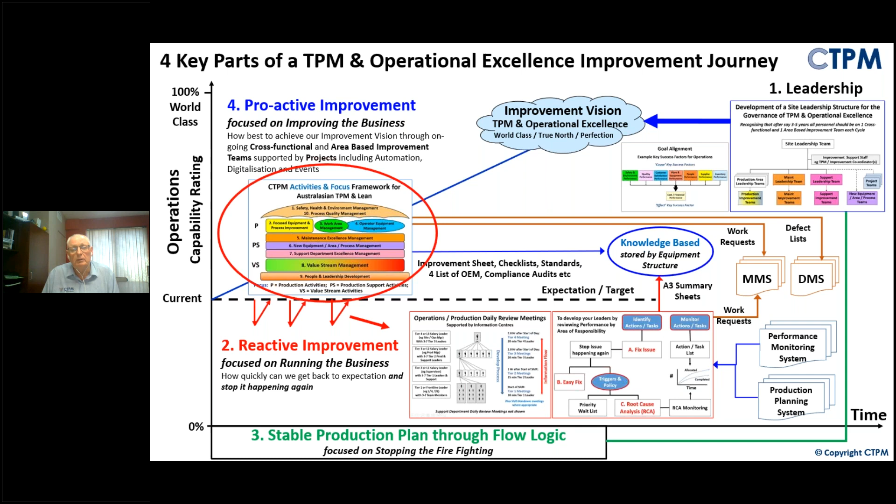I thought just to put this into context of our 4 key parts of an operational excellence improvement journey, which is leadership, reactive improvement, stable production plan, and proactive improvement. What we're talking about today is some of the activities and focus of our proactive improvement, which is our hamburger model, and it's got the area that's probably the biggest focus when you first initially start looking at OEE and productivity in a production environment.

You would look at focus equipment and process improvement, which is a cross-functional team, and then later on you'd move on to the work area management and operator equipment management activities, which are area-based, production area-based teams. But overall, it's not only the production area, but it's the support areas that also have a big impact on OEE and productivity. So it does cover a fair bit in this area.

So let's get started with the equipment effectiveness and people performance, and start off with equipment and overall equipment effectiveness. You've probably all seen the OEE model, which is about availability, rate, and quality, based on the premise that equipment is not effective unless it's there when you want it, running at the ideal rate, and producing perfect product first time. Now, in our model, we have the 7 big losses, unlike some of the early models of OEE when TPM was first developed, where they didn't include planned downtime.

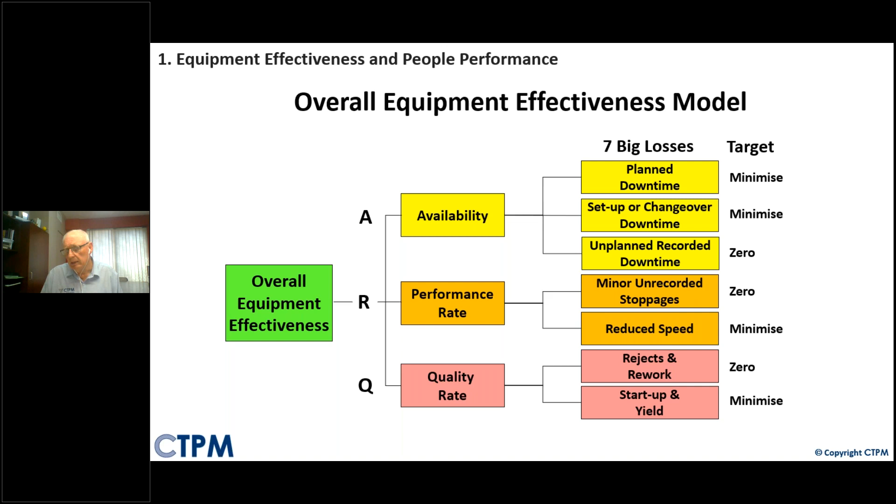What we've learned, and also the people who developed TPM, the Japan Institute of Plant Maintenance, or who recorded it - Nippon Denso or Toyota actually developed TPM - but they've now added the planned downtime in their model as well, because what we find is a lot of plants run more than one shift, and also there's a great opportunity there to impact on the output of the plant by managing planned downtime.

So why is OEE improvement important for TPM and operational excellence? Well, we want to increase capacity, and every increase in percentage OEE should result in equal percentage increase in good output, or be able to make the same amount of good output in less time. And that's why it's important to have the 7 big losses.

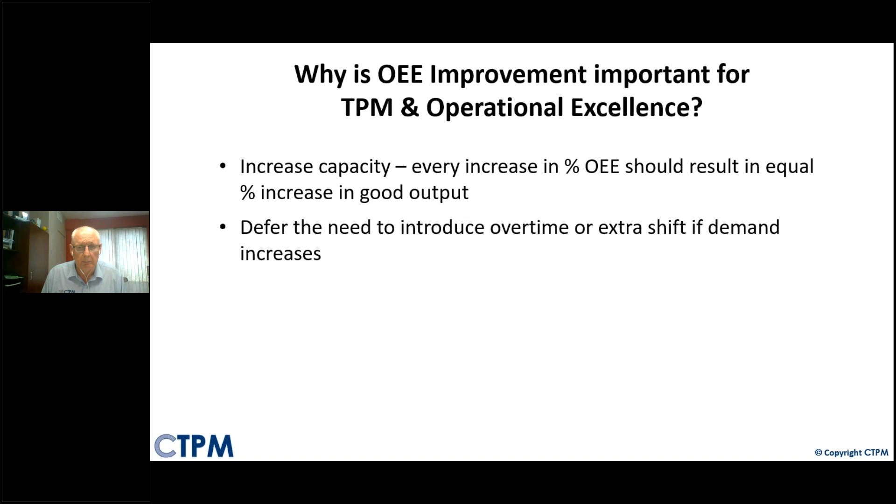We want to defer the need to introduce overtime or extra shift if demand increases. One of our clients, Cooper's Brewery, over in South Australia, since their journey, when we started, I think back in about 2003, in the early days, only running one shift, but they kept getting bigger and bigger demand. But by improving OEE, we were able to defer the need for the extra shift for quite a number of years. We also want to free up time for production area-based team improvement activities.

And I spoke about work area management, which is our version or an enhanced version of 5S, and operator equipment management, or some people refer to it as autonomous maintenance, where production line may need to stop, especially while doing clean for inspections. So if you've got to stop your production line, you need to compensate that by increasing your OEE first.

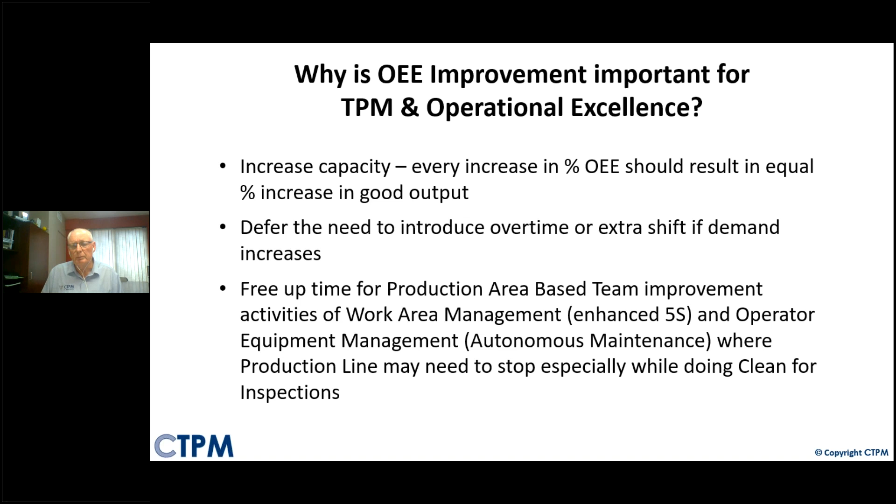And that's why we start with focused equipment and process improvement cross-functional teams, which do not require the line to stop, before you move into your area-based team activity, which if you don't do, you'll miss out on probably half the gain of improving OEE.

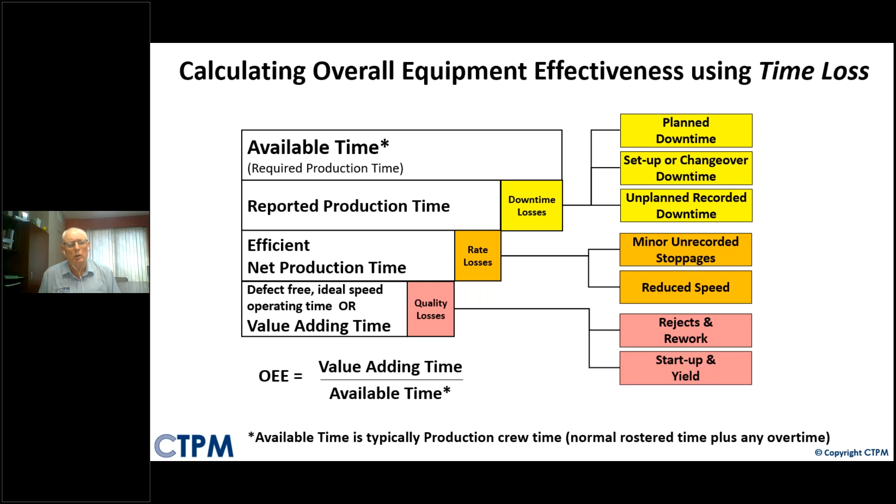So how do we calculate OEE? You can use what we call the time loss approach, where you start off with your available time and take away your downtime, rate losses, and quality losses, and your OEE is value adding time over available time.

What a lot of companies do is create what we call an equipment loss model, which is a little bit more detailed than what I just showed you, where you start with your theoretical time, which is, if you're measuring for a week, that would be 7 days, 24 hours by 7 days, 168 hours, for example.

Now, there will be no demand, and that would be, for example, you may not want to run your plant on the weekend, so you're running 5 days. No demand is a loss that is really dictated by your marketing and product development people, because they're the ones who will put demand on the plant. Got nothing to do with operations.

Then you have special events, and we tend to identify those because that, again, takes up some time, and we normally take that out of the OEE equation. So special events might be new product trials, or you may have a major shut. You might have regular monthly 8-hour shuts on your line for maintenance, but every 6 or 12 months, you might have an extended 24-hour shut or something like that, which is a one-off event.

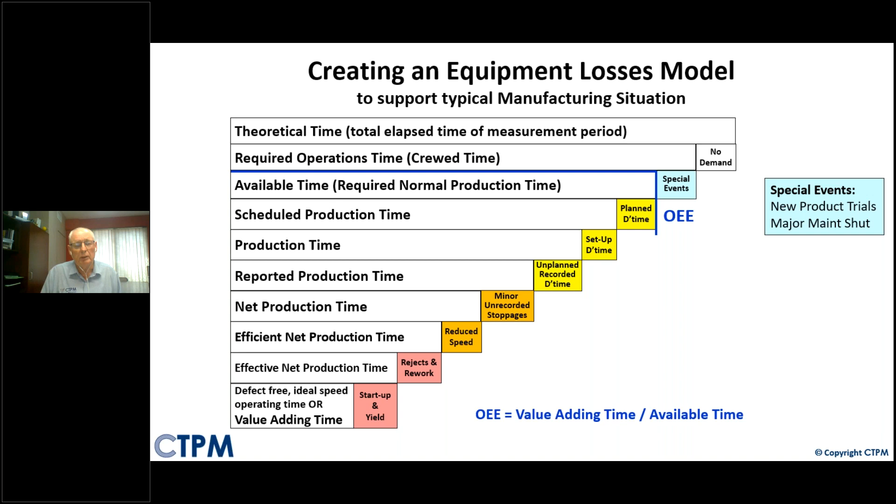So again, we pull that out of the equation, which means your OEE is available time with all the losses, and OEE is value adding time over the available time.

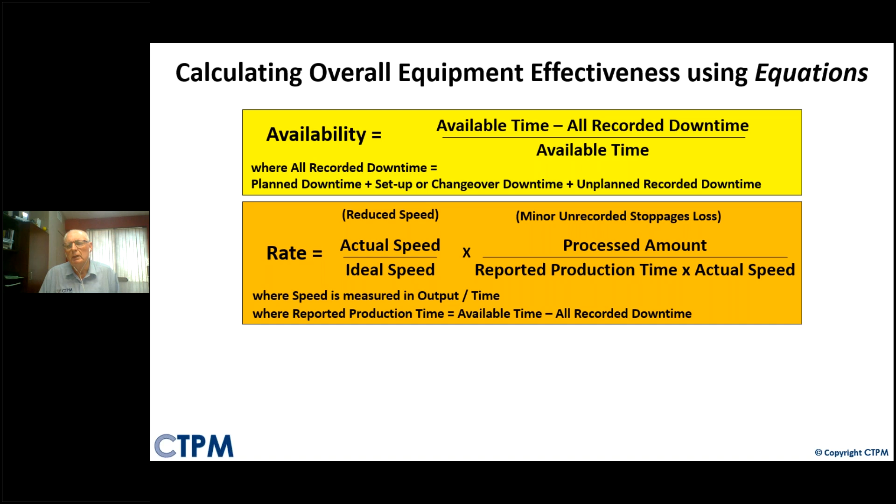The other way of working out OEE is using equations. So you have an equation for availability, you have an equation for rate, which takes into account reduced speed and minor unrecorded stoppages. And you then have your quality equation, which we often use a mass balance approach for, good output produced over processed amount.

By having those three measures as percentages, you can create your OEE by multiplying availability by rate by quality. And what we've done in our training is we get people to calculate OEE using the time loss model and the equations, and you should come up with the same result if you're doing it correctly.

Now, there's a simple way of calculating overall equipment effectiveness using what we call the high-level equation. The high-level OEE can be calculated by multiplying the availability, rate, and quality equations and reducing the common parts. So if it's on the denominator and the numerator on more than one equation, you can pull it out, and that results in a simple formula.

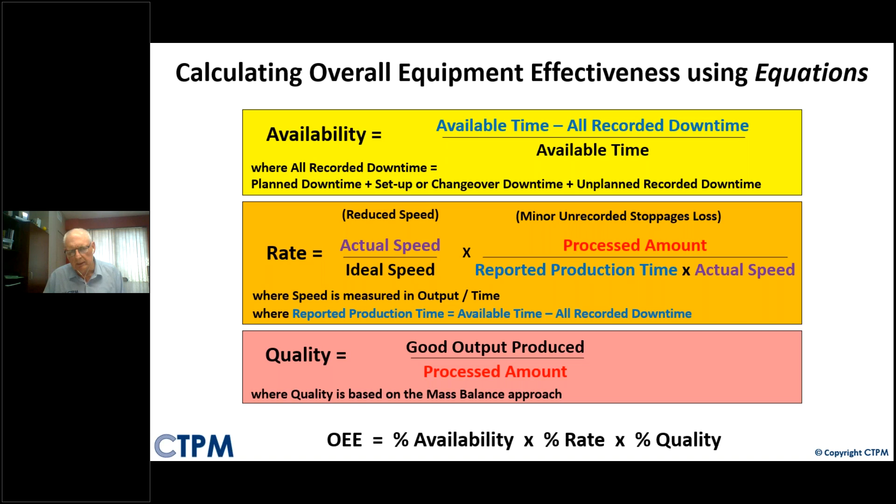Just to explain that in a bit more detail, with availability for example, you'll see those in color: the blue and the blue crosses out, the purple and the purple crosses out, the red and the red crosses out, and you end up with your good output produced over available time times ideal speed. That's what we call the high level equation. And obviously when you create an equation, you have definitions for what we mean by available time and what we mean by ideal speed.

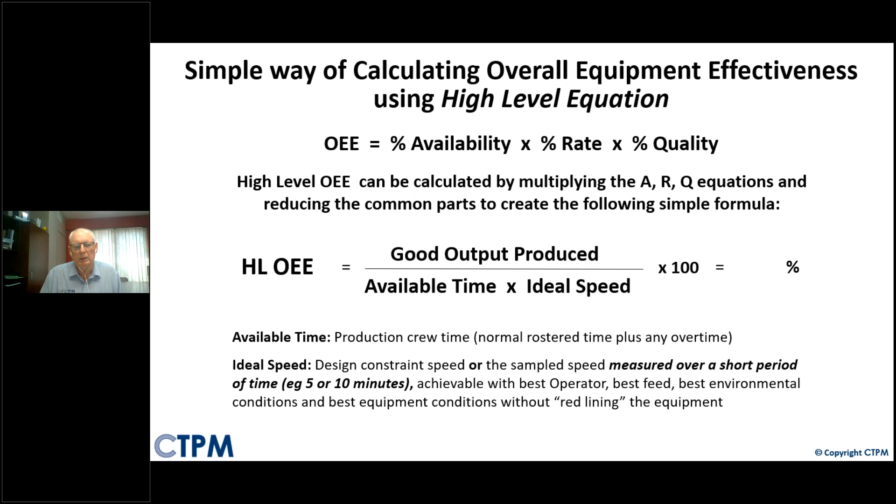Now, what's the advantage of a high level OEE? When we go into sites, we often find that they are graphing their OEE performance based on their recording system, whether it be automated or manual. And what we do is go and look at using the high level equation, because we know that is the most accurate way of measuring OEE. It doesn't tell you where the losses are, but it's the most accurate method.

So what about people performance? We've talked about equipment performance. Let's talk about people performance. That's normally productivity. Now, productivity can be measured in two broad ways.

One is what we call company productivity, which is the total sales dollar value over the total number in the workforce. Coopers Brewery used this as one of their measures. When we first started in 2003, that figure was roughly $500,000 sales per employee. In the last year or so, when the operations manager gave a presentation, he was talking about now they're generating productivity of about $1 million sales for every employee. That covers the whole company, but it is a productivity measure, and obviously has a lot to do with your product development and marketing to improve the productivity of the total workforce.

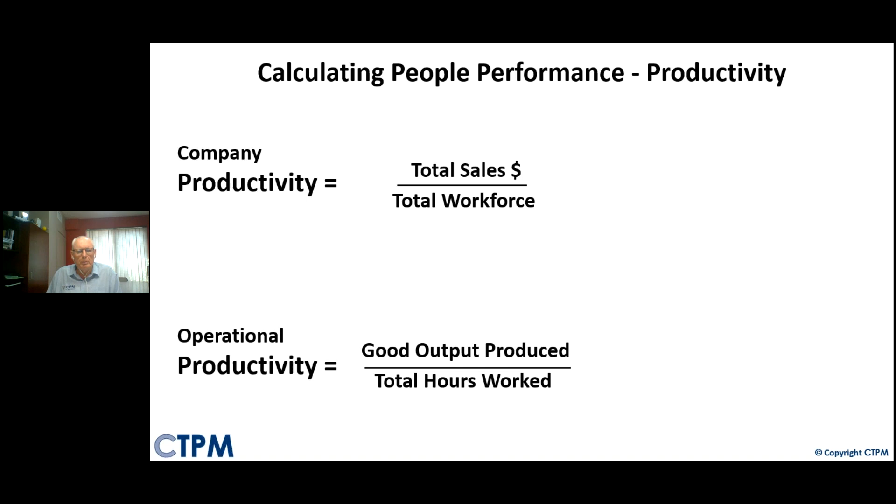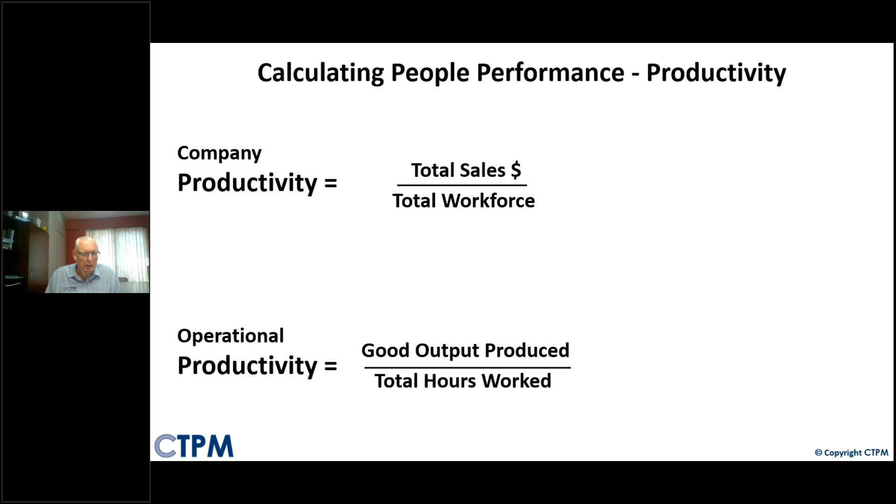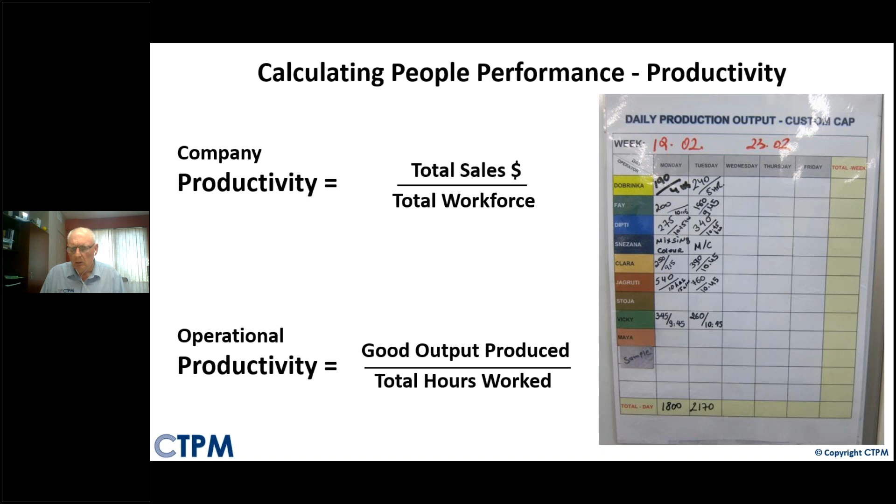From an operational perspective, productivity is more often measured on the basis of good output produced over the total hours worked, or the total hours you put into the production line or production area. An example, one site we're working with, they used to record this. This was an interesting operation, because they were putting printing logos onto safety helmets. They had a number of different printing machines, all with different parameters, running different ways, with different mixtures of numbers of colors in a logo, and how many logos went on the helmet. So they were capturing what they were doing, but that information was pretty much useless unless you started relating it to a particular product. That's sometimes one of the issues with productivity.

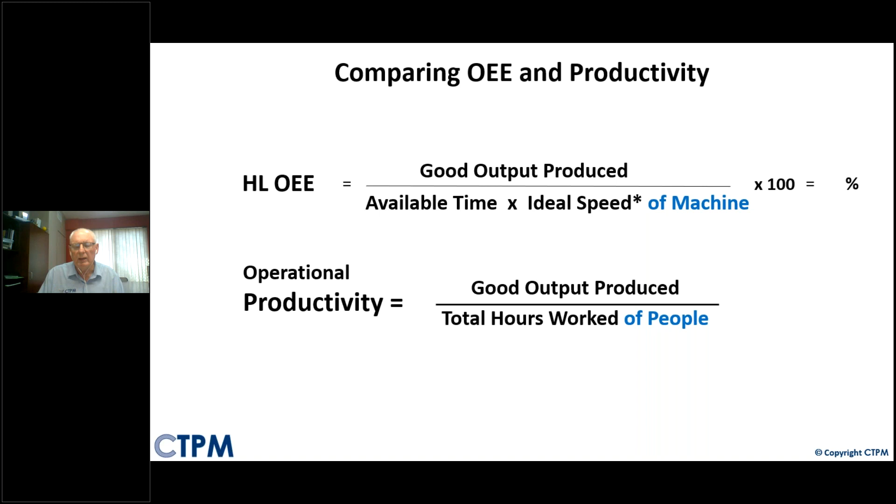So comparing OEE and productivity, our measure for OEE is good output produced over available time times ideal speed, and that's all about the machine, the available time and ideal speed of the machine. Operational productivity is the same good output produced, so you've got this common factor. However, underneath, it's got nothing to do with the machine. It's how many people went into producing that output. This is where they are quite separate measures, and hence you need to measure both.

OEE will not reflect on the people input. It is not designed to reflect on people input unless, of course, you're adjusting the ideal speed, because your ideal speed is the best possible speed you can get out of the machine. Now, if you've got a machine that is influenced by the number of people - for example, if you have a line where extra people at the end packing quicker means the line can produce more - then if you're manning it with, say, 4 people in the packing area instead of 3, your ideal speed changes. And that will reflect a bit in your OEE. But that's becoming quite a complex little exercise. And a lot of companies...

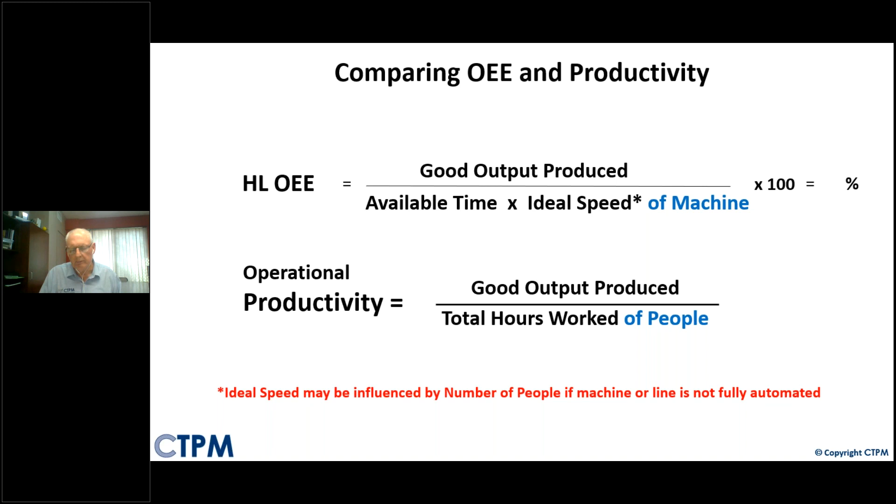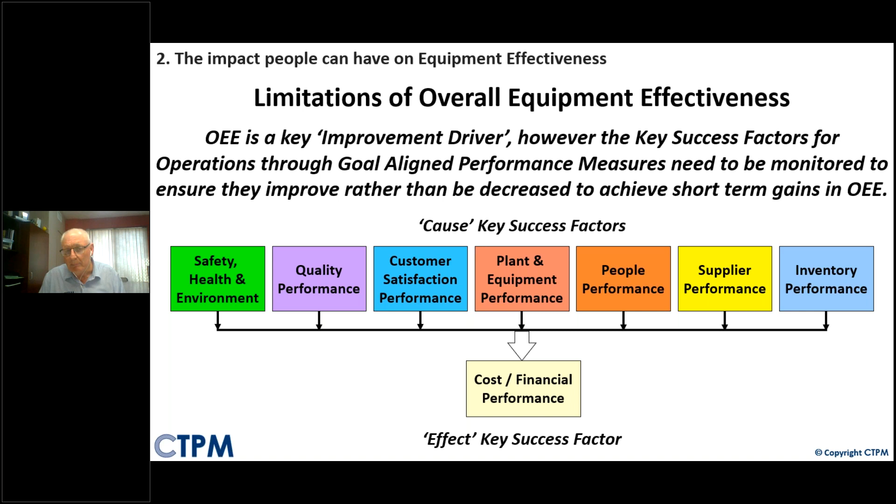So that's the measurement model we look at. And if we just think about the implications of some of those factors, for example, safety, health, and environment, you want to measure that to ensure people aren't doing unsafe tasks to improve performance. In other words, taking risks to get more good output.

And that would affect both your productivity and your OEE. Quality, to ensure we do not lose sight that quality is the most expensive of all the losses and waste, especially when you're measuring OEE.

For example, a slide from our online course or two-day workshop. We put this slide up and say you can have two situations. When measuring OEE, it's availability times rate times quality. So you could have an availability of 90, a rate of 95, and a quality of 99, and multiplied out you get 85%. Or you could have another situation where availability is 99%, rate is 95, but quality is only 90 - in other words, 10% of what you make you're throwing in the bin. You've still got 85% OEE, but which situation is best for the company? Well, in most cases, situation one is much better, because you're not throwing away 9% of your raw materials or your products that you've added value to.

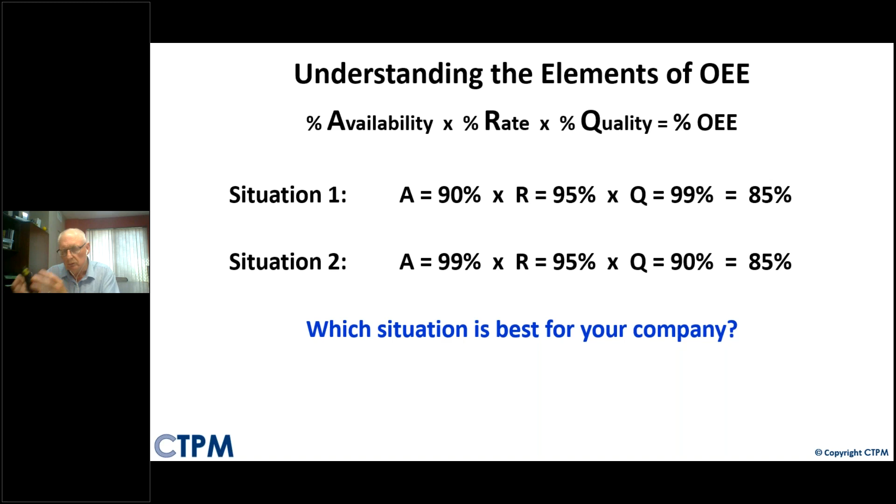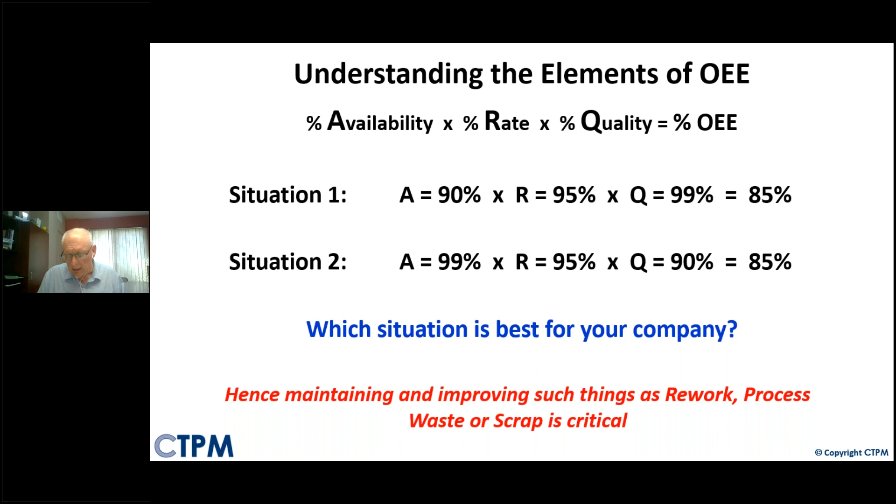Whereas in situation one, yes, you're not running the line 10% of the time, but you're not wasting any product. In situation two, you're wasting a lot of materials. So that's why maintaining and improving things like rework, process waste, and scrap is critical to focus on. You've really got to understand the elements of OEE, and of productivity, when you're trying to measure good output.

Other things: customer satisfaction, to ensure there are no downstream customer complaints resulting from a strong focus on getting product out to achieve a good OEE result. I've seen situations where people make products, move them into storage, or - in one case - a site made a cement board that went into an autoclave and cooked for 24 hours. Then it came out and went onto the finishing line. But to improve their OEE, they sped up the line, which put ripples into the board. So when it went to the finishing line and had to be sanded smooth, there was a lot more work involved. So OEE looked good, but the downstream finishing area wasn't impressed. That doesn't show up on your OEE measure - it shows up as an internal customer complaint.

Plant equipment: to ensure good output correlates to OEE, so all losses are being captured - we've talked about that. People: to ensure more people aren't allocated to an area to compensate for problems affecting performance.

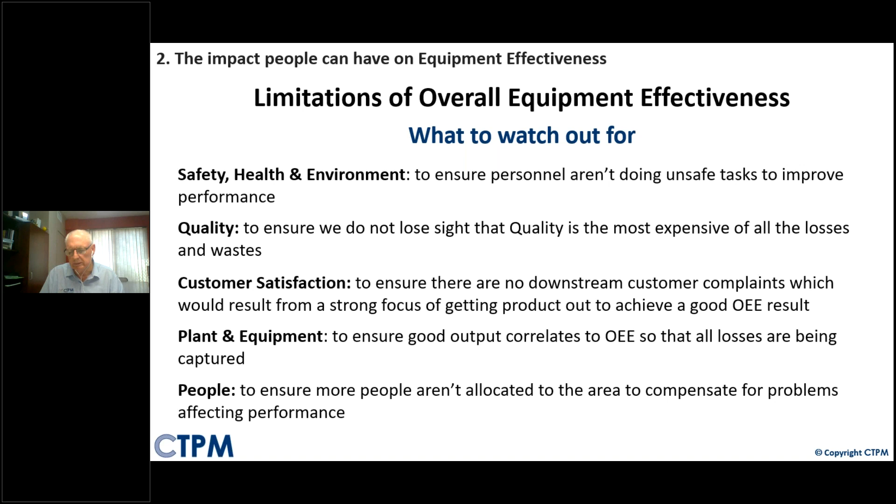I've been on a site making little blocks of butter. On the machine, the block would come in, they'd carve it up, wrap it in a foil special label, fold in the ends, and it would go off to be packaged. What happened on this line was the machine folding the ends had a fault on one side. So rather than stop production, they put an extra person on the line whose job was to simulate what the machine did - fold the end of the block as it went past. By the end of the day, the OEE was good, the line didn't stop, the line made the output. However, if you're measuring productivity, it was down because you had an extra person on the line. This is where you've got to measure both - you can't just look at one of them.

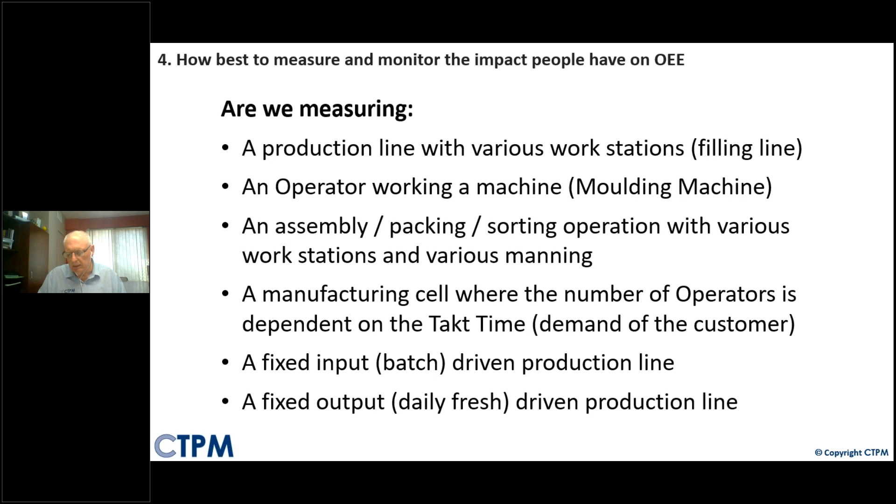Then you've got fixed output, like daily fresh, making bread—people want a certain amount of loaves per day, or printing newspapers, you only want a certain number. Again, different scenarios. So all these scenarios need to be well thought out in putting together the best way to measure what we're doing.

Moving on to the last point, the importance of a team-based approach. We are very strong on what we call ongoing improvement, where it is team-based, so people are growing and developing in a team environment. It's about getting everyone to spend, for example, 5% of their normal work time in an improvement team all the time, as part of their job.

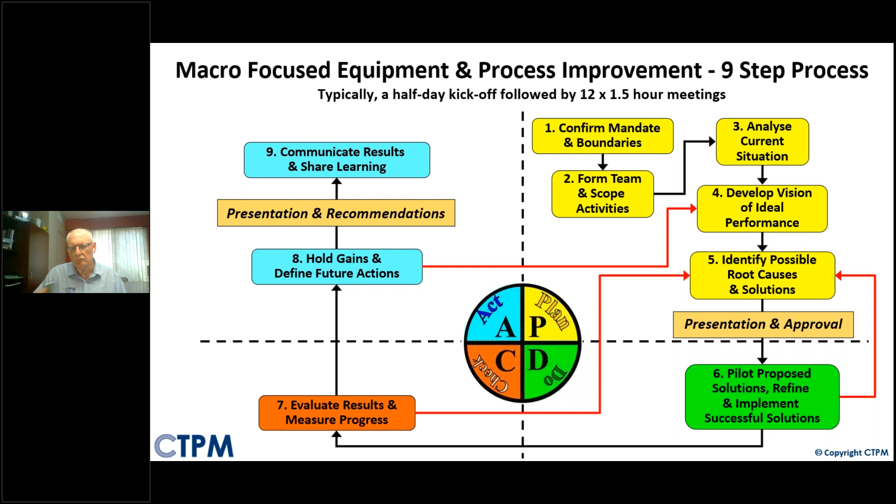You're using a 9-step structured process, which is well proven, using plan, do, check, act, recognizing as you progress there's some iterations. If things don't actually get the outcomes you want, you come back and recycle. So it's not just a straight linear process, it's an iterative process.

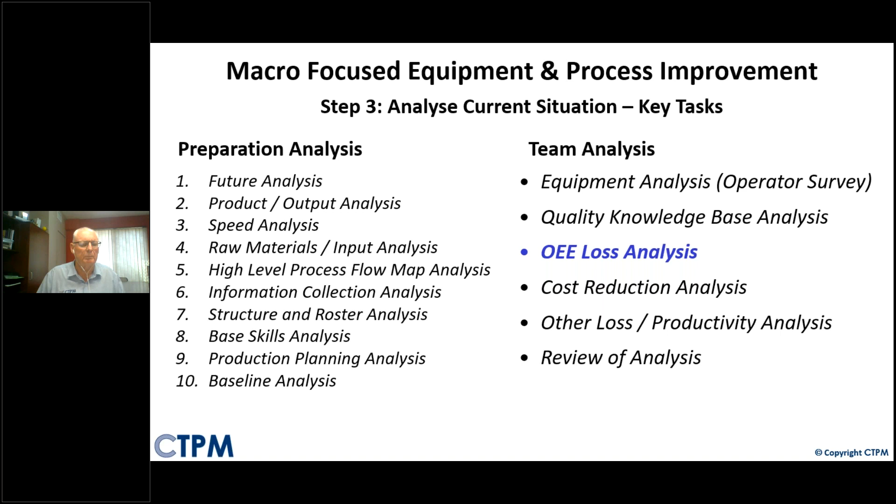So you start looking at the people side. You can then put a pretty holistic picture together of what's happening out there and where the opportunities are.

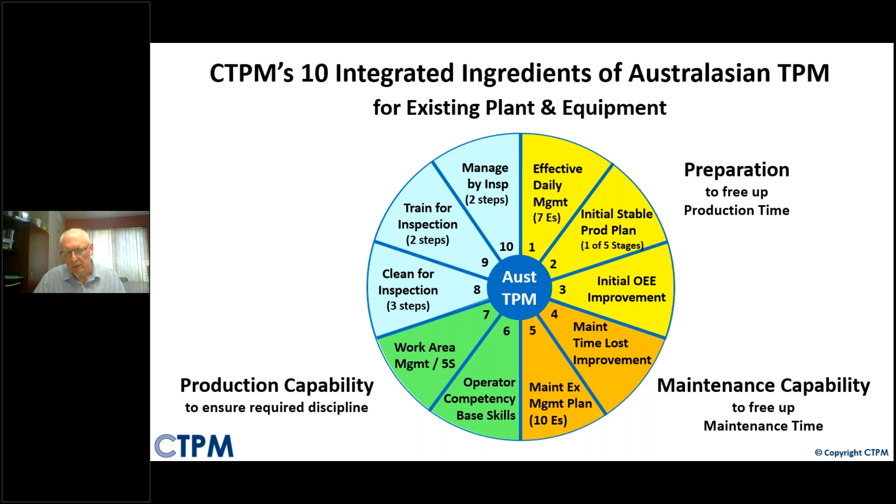From our TPM perspective, we use this model to explain to people what's required if you want to go down the TPM journey. You've got to do preparation to free up production time, you've got to do maintenance capability to free up maintenance time, you've got to do production capability, so you've got the required discipline for your production area-based teams to get involved with the autonomous maintenance or operator equipment management activities to achieve TPM excellence. And if you don't go in that sequence, it just doesn't work.

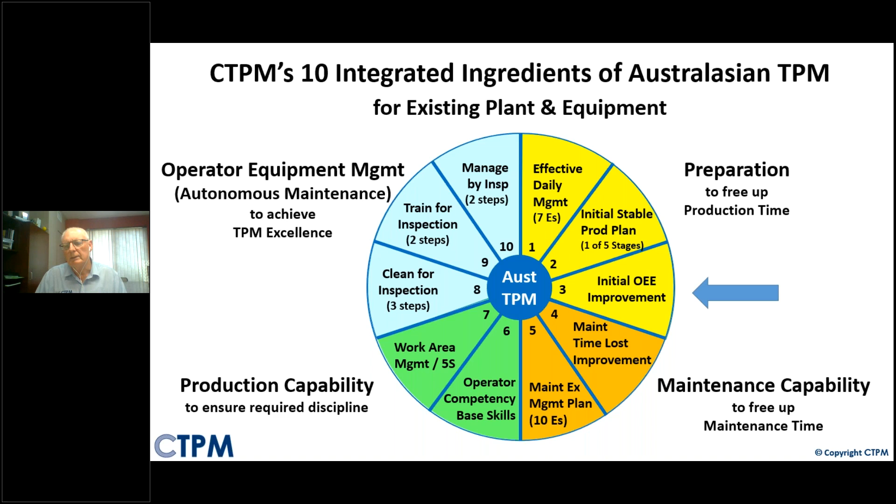I've seen many, many examples where people just dive straight into, let's do autonomous maintenance, without doing all the prep work. What I've been talking about today is this initial OEE improvement, which is also looking at productivity as well. So hopefully that's been of some help to you. I've gone through it pretty quickly, but I think it's given you a flavour of some of the issues you need to consider.

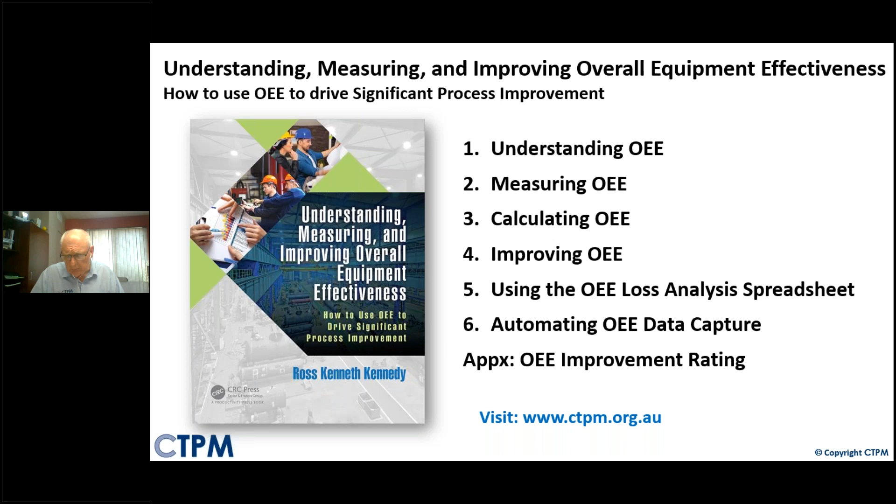How can we help? The reason I wrote my first book on understanding, measuring, and improving overall equipment effectiveness is to help people understand what I've been talking about in a lot more detail, and take you through how to get an improvement team and how to develop what we call an OEE improvement matrix and the spreadsheet to really drive improvement.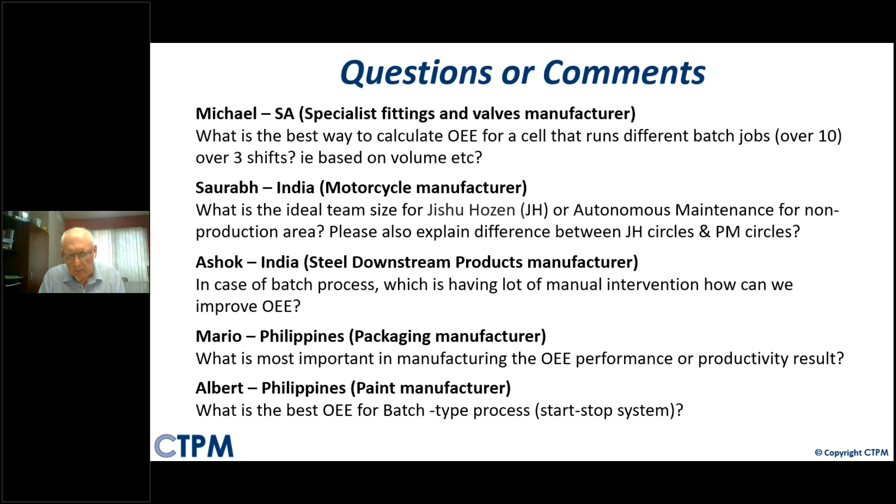So I hope that's given very quick answers. Happy to further those answers if you wish, by either contacting me or sending me an email. With that, I don't know if there's any other questions.

No, I haven't seen any come through. We just had Ashok send a little note just saying thank you for answering his questions. So that was nice. We haven't got any others through. I think you answered quite a few questions there.